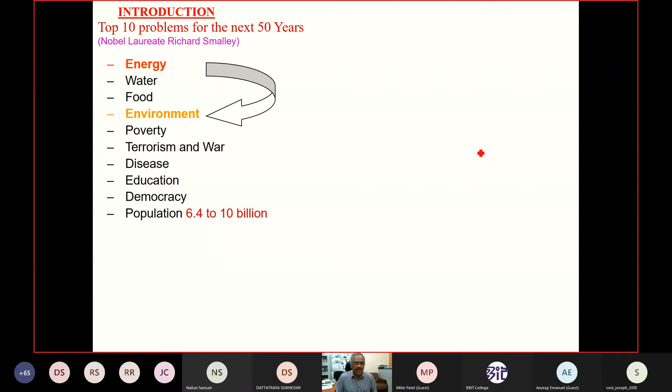If you look at the present scenario, we are facing several problems, and if you list out the top 10 problems for the next 50 years or 5 decades: energy, water, food, environment, poverty, terrorism and war, diseases, education, democracy and population. But energy cannot be addressed in isolation. Energy will always be tied with the environment because any energy consumption will have an impact on the environment. So energy and environment go together, and the top three problems—food, water, and clean energy—are very important.

Apart from that, energy consumption can solve most of these problems, and the world's energy consumption is rapidly increasing, exponentially increasing. Mainly, predominantly, this is a fossil fuel based energy scenario, so therefore the environment will have a severe impact.

The standard of living of any country depends on energy consumption. So energy consumption is very important, and one aspect is what you mentioned as buried energy - that means the energy which is mainly for space heating and other applications. But now I'll mainly focus on renewable energy, mainly solar energy, and how we can use it for heat, mainly space heating and cooling applications, which we'll discuss as part of this course.

Before that, we should know what this energy is, how it is coming, and what the major issues with these energy sources are. Energy sources can be broadly classified into two categories. One is celestial or income energy. This celestial or income energy is reaching the Earth's surface from outer space. That's why it's called income energy, or which is coming from outer space.

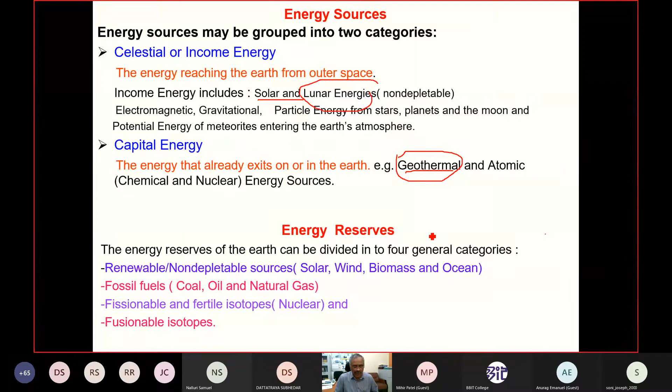If you look at these sources, they are transformed into reserves, and energy reserves of the earth can be divided into four categories. One is renewable or non-depletable sources, which includes solar, wind, biomass and ocean. Then fossil fuels - coal, oil, natural gas - and nuclear. The nuclear can be any form, like fusion or fission.

As I mentioned, the present energy scenario is fossil fuel driven, so there's an adverse effect on the environment also. The technological challenges mainly for greenhouse gas concentration in the atmosphere mean no single policy can address this problem - there are different regions, resources, markets, preferences, scale-up requirements, technology timings, and infrastructure.

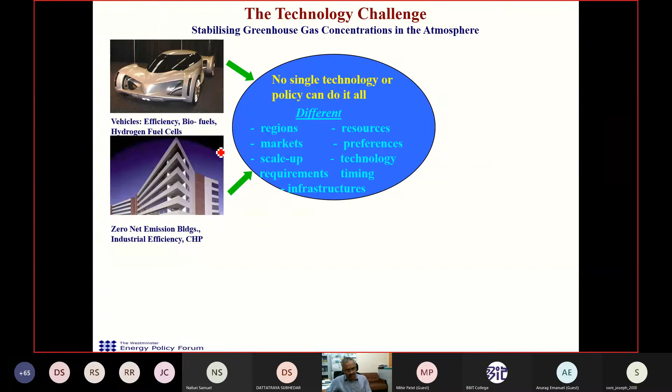If you look at that, there are various technological and other aspects. Those include energy efficiency in vehicles, biofuels, hydrogen fuel cells, and so on. Then buildings - net zero emission buildings - industrial efficiency, combined heat and power, nuclear power generation, carbon sequestration, and advanced power grids, and biofuel, solar power, renewable energy in various forms.

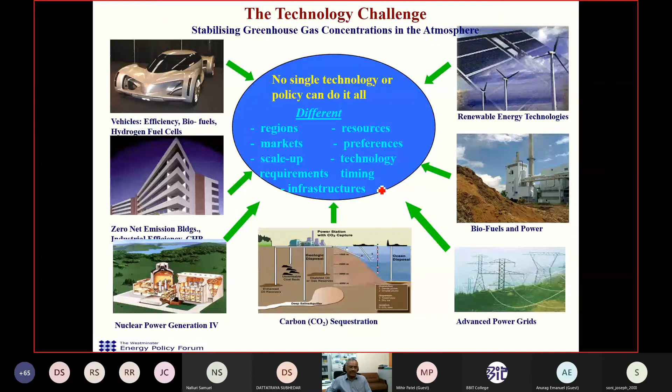So because it's not a single technology solution that can serve our purpose, it's important to have a comprehensive energy system analysis. This can bridge the gap between energy demand and supply. Not only that, environmental concerns will also be addressed through a comprehensive approach, so it's important to stabilize the greenhouse gases.

So therefore, it's important to utilize renewable energy for energy consumption.

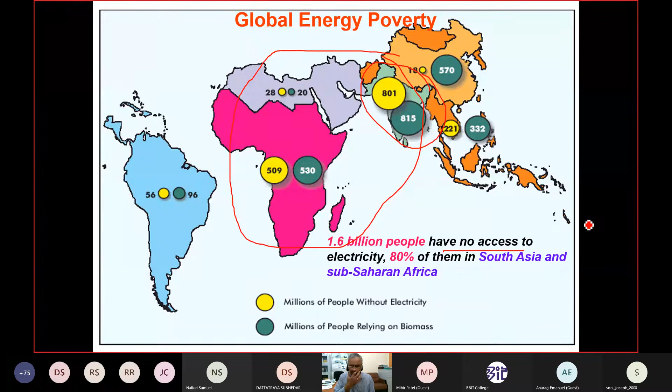So therefore, it's very important to come up with sustainable energy. Energy sustainability is very important.

As far as India is concerned, we import all forms of energy sources like coal, oil, and gas. India is a large producer, the fourth largest producer of coal, but still we import coal because of its quality. Most Indian coal thermal power plants import coal from Indonesia, Australia, and South Africa. Apart from coal, other important energy sources we import are oil, gas, and nuclear. So energy sustainability is important.

In fact, more than 75% of oil is imported. Once the oil is imported, it's primarily meant for mobility applications like transportation. So we feel that we need this transportation.

Look at the cars now - you name any car in the world, they are available in India. If you look 20-25 years back, there were hardly one or two car companies. Now there are many car companies, and most of these cars are based on non-indigenous, foreign technologies, and we are consuming foreign fuel and polluting the Indian environment.

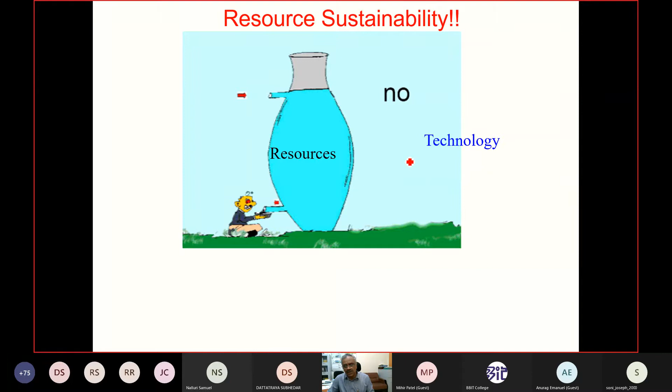If you have the technology, we can keep resources for future generations while taking our own share through this technology. These technologies, as far as energy is concerned, mean renewable energy technology - this is only symbolic, but what I mean is sustainability is important. Energy sustainability is important, because future generations need to remember there is only one Earth.

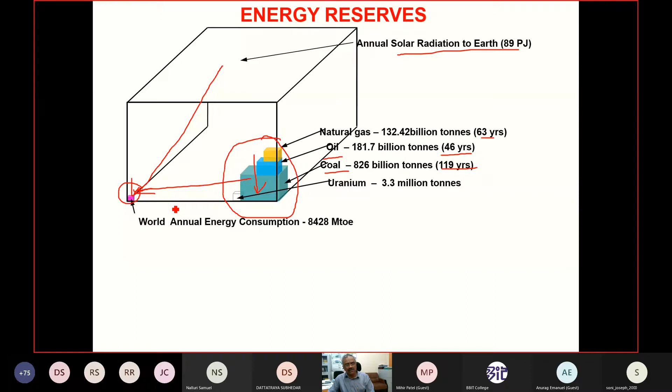But in contrast to this, there is unlimited annual solar radiation available, which can feed the demand indefinitely. If you look at statistics on energy stocks, we have abundant coal, a large amount, but it's poor quality coal. Oil is very limited, gas is very limited, and nuclear to a certain extent. So the oil and gas we may not see after a couple of decades.

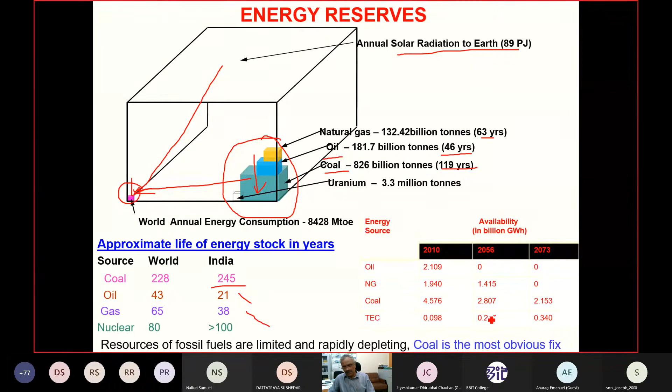Therefore, it's very important to come up with clean technologies. The most important clean technology approach is renewable energy technologies, primarily solar energy. All other renewables like wind, biomass, and other forms of renewables are manifestations of solar energy.

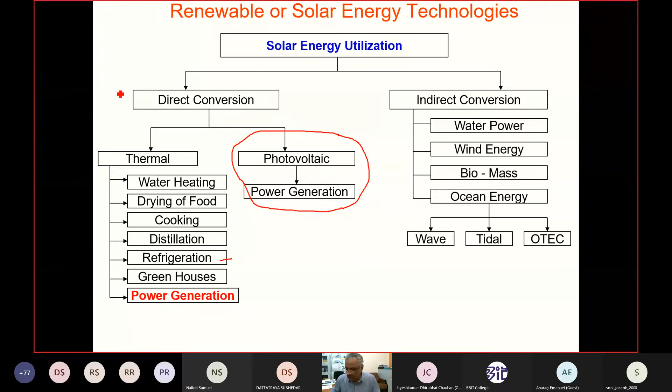So there are several technologies. Mainly, I am going to discuss some of the indigenous technologies, more used for sustainable development, and how the energy can be used for building sectors also, because the focus is on the building sector.

So concentrating solar power is producing high temperature heat, and mainly electricity is produced by burning fossil fuels. Coal is burnt and supplied to the heat engine. But if we replace this coal by sun's energy to produce electricity, then it's called a renewable system.

Since we need high temperature, we need to concentrate the solar energy, so it's called concentrating solar power. There are several technologies available to convert solar energy into high temperature heat: parabolic trough, parabolic dish, linear Fresnel reflector, power towers, and so on.

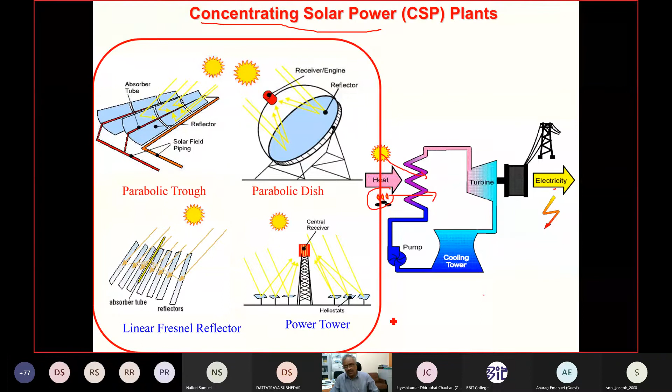Based on temperature, they can be classified into CSP technology for medium temperature and high temperature. Medium temperature is between 100 to 400, whereas anything higher than 400 is referred to as high temperature. These technologies exist for both medium and high temperature, and are essentially concentrating solar power technologies. In the medium temperature category, you have linear Fresnel reflector and parabolic trough collectors, while the other side is central receiver and parabolic dish.

So we are working mainly at IIT Madras on indigenous technology development, on solar energy activities, mainly concentrating solar power, solar thermal technologies, mainly design of solar thermal concentrators and receivers. Apart from that, concentrating photovoltaics, mainly integration and optimization of high performance solar concentrating photovoltaic systems meant for cogeneration and trigeneration aspects.

Solar energy storage and desalination are also important. The design of a transparent insulation material based solar integrated collector storage is one area where energy efficiency is taken into account. Apart from that, solar desalination materials for solar energy conversion and characterization of solar energy materials.

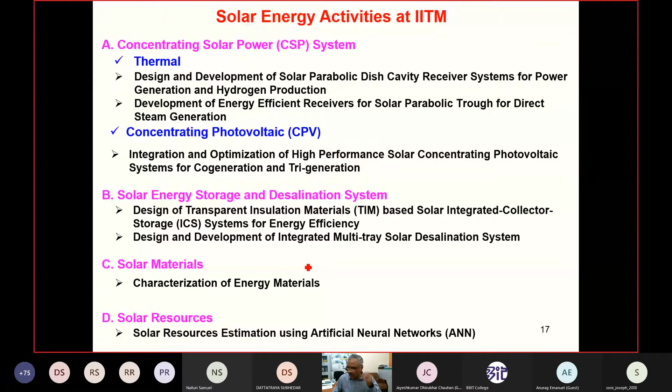Resource estimation is about finding out the energy available at a given location, mainly to come up with new systems at new locations, so it's important to know the solar resources. This can be either measured or estimated. If measured, we need instrumentation, which is very expensive, so we go for estimation. Estimation requires tools, and artificial neural networks is one of the important tools for estimating solar radiation.

Another application is desalination. Water is everywhere, but we need potable water, and that conversion requires energy. Solar energy conversion becomes an attractive option here, whether it's brackish water or sea water. Especially along the entire Indian coast, solar energy can be used to produce pure water.

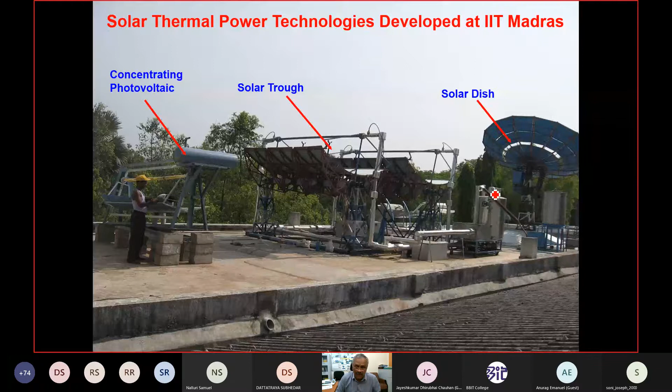Our approach is a 4D approach: design, development, demonstration, and deployment, mainly for concentrating solar energy. It is developed to the demonstration scale, so it can be taken directly to the field. We have some industrial associates who have already taken some of this technology to the field.

This is one such concentrator, made of mirrors. Radiation from the sun comes here and gets reflected. This is a collection receiver which collects the reflected radiation, and subsequently it is transferred to the working fluid and taken back. This requires two-axis tracking.

Development of cavity receivers for such high temperature and high pressure applications is very important. We have done substantial work on solar receivers, mainly for process heat and power generation applications.

This is a dish that rotates on two axes, with respect to both elevation and azimuth, and we can circulate fluid through it. This is a typical photograph of that setup, and the receiver plays a major role here, mainly for solar thermal conversion. Otherwise, there would be plenty of heat losses to the atmosphere.

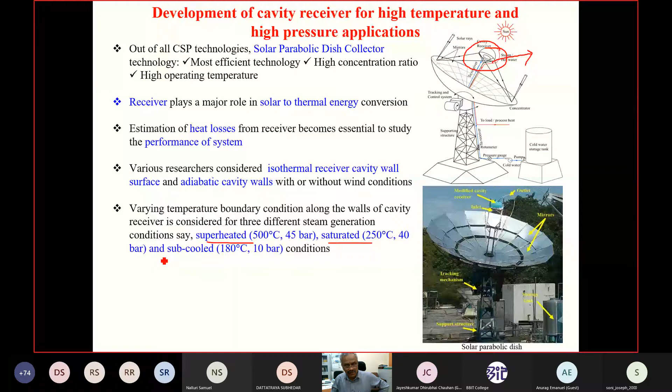So losses from the receiver are an essentially important consideration for performance when studying the system. Various considerations are taken into account, such as isothermal walls and adiabatic walls, and we study superheated, saturated, and subcooled conditions with respect to temperature and pressure. This has a wide range of applications: superheated steam can be used in power generation, saturated steam in food and textile industries, and subcooled systems in pulp industries and air conditioning applications.

As this program is on building energy, which can be used for space conditioning, similarly solar energy can also be used for space conditioning applications. Then we did a lot of numerical studies.

This mainly involves development of receivers and analyzing convection and radiation heat losses using computational methods, showing the distribution of temperatures and fluid flow. The fluid enters here, flows through, and comes back as high temperature heat.

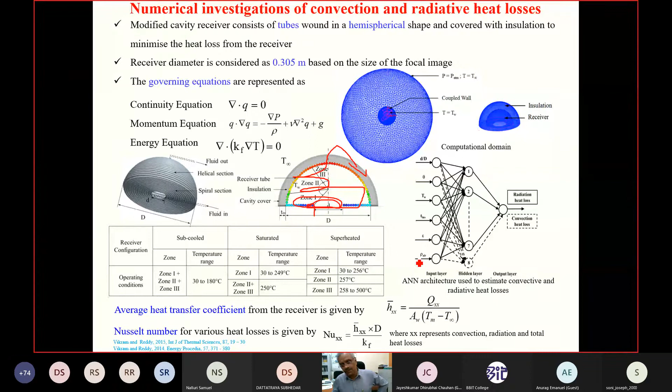We use neural networks to estimate the overall performance of these receivers based on the construction. Several receivers have been studied, mainly for optimizing based on heat transfer and overall performance and heat collection.

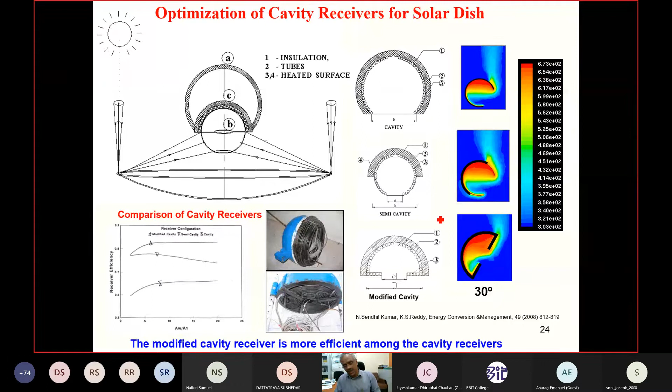There are essentially three receivers: cavity, semi-cavity and modified cavity receivers that have been tested. The modified cavity receiver has to be tracked continuously from morning to evening, so the heat losses differ from morning to noon, and it's important during tracking to estimate the heat losses.

It is designed from the accurate sharp dish to the fuzzy focal dish, and then it's a wide angle reflection. The receiver plays an important role, mainly in collection of solar energy, and it should convert maximum energy from solar energy with minimum losses.

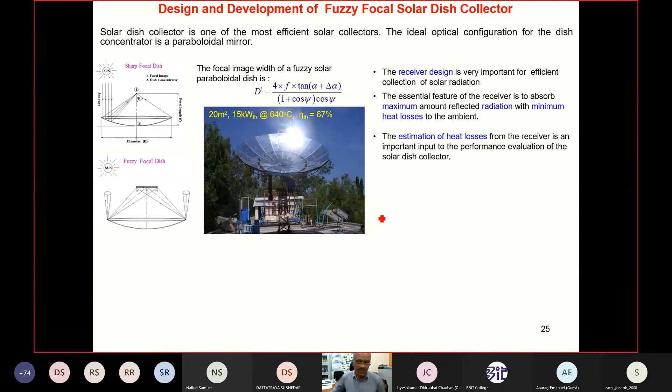So its geometry, orientation, temperature, and wind speed play an important role, and the modified cavity seems to be more efficient compared to the others. A detailed analysis has been carried out for heat losses and so on.

So the average, these are mainly non-dimensional parameters, and we studied the different heat losses in different orientations, because the heat loss to the environment will have different configurations - it dynamically changes depending on the location of the receiver.

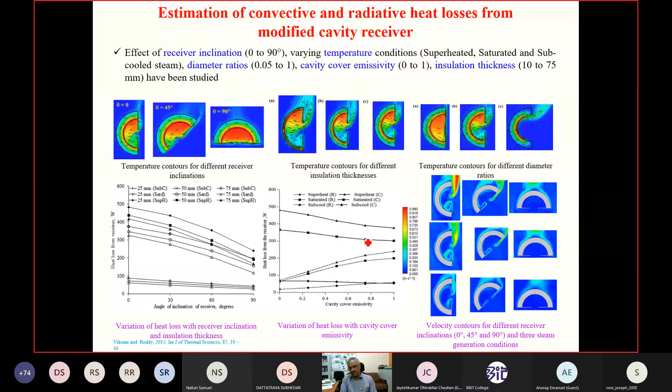It has been estimated and found that wherever higher losses are involved, they can be avoided by appropriate designs and so on.

It can be placed in a large scale field. We are now planning to use this dish collector system mainly for space conditioning, geothermal, in the Ladakh and Leh region. Recently we got a project to produce heat, so that heat can be used for space, like building space conditioning, and can also be used for cooking applications and for a food dryer.

In the Ladakh region, apricots are common, so drying of fruits is also very important. Solar energy produced by this type of dish collector can be used for these applications: cooking, drying, and space conditioning.

I'm not going into the details of the mathematics, because for one system, we cannot go for an infinite size - it is finite. But if you want to go for a large scale power plant, it needs to be connected as an array, connected in the field.

When you have a field, there are several dishes surrounding a given dish, and when the sun moves from east to west, it gets covered and no energy comes through. So it's important to have appropriate spacing between them.

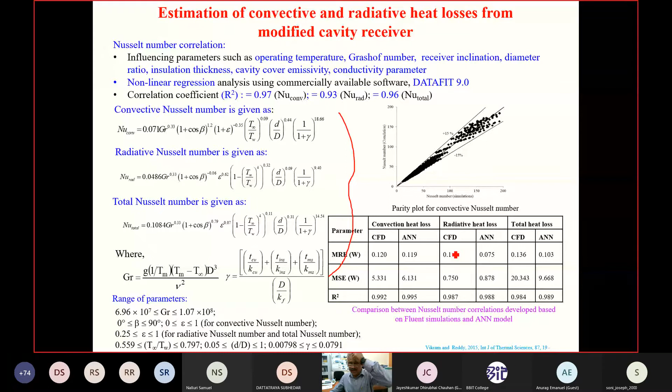So we have to find out the estimation of these losses from the modified cavity by different methods. Mainly natural convection and forced convection play a major role, and we need to find out how this depends on temperature, compared with ANN, artificial neural networks.

There are several losses involved here - head-on losses, side-on losses - and these losses need to be predicted by estimations, and we have to see how they vary from time to time, from 0 degrees to 90 degrees and so on.

Forced convection heat transfer is sometimes predominant, mainly under saturated and superheated conditions. So it's important to study explicitly how the behavior is.

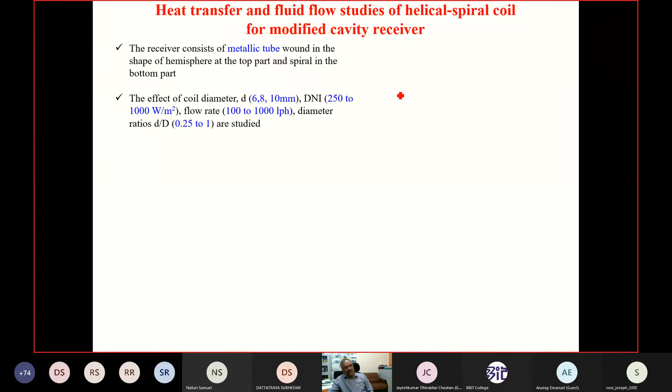The receiver is very important because it is the heart of the system. The receiver should collect maximum energy with minimum losses. There are metallic tube collectors, receivers, of different sizes of concentrators, and we need to determine the length of the receiver required, and so on.

A typical concentrator looks like this, with a monotube boiler concept, and we can look closely at how the gridding and grid generation is done here.

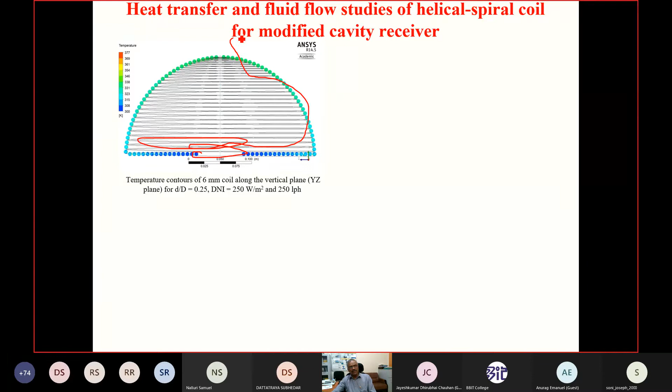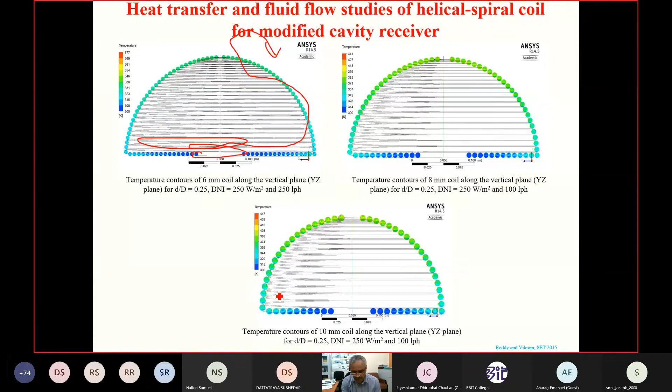So the heat transfer through helicals, it goes here, as I mentioned, and then comes out from here. So heat transfer studies are very important with respect to flow conditions, and these are 3 different conditions where low temperature hot water is circulated in the boiler, producing saturated or superheated steam.

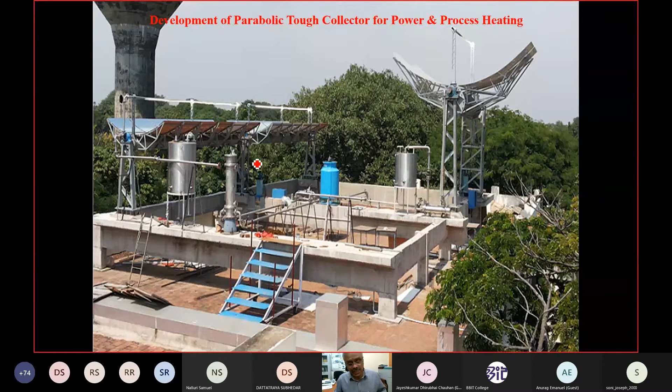This is a very important thing. We can go for process heat and power generation applications at large scale. This is installed in our lab at IIT Madras with a heat exchanger network, and here the receiver plays a major role.

It's an enclosed receiver - absorber coating, vacuum, and glass envelope, glass to metal seal, absorber stability all play a major role. It's an important component, so it needs to be developed indigenously and used for local conditions, because these have their own issues like absorber coatings, vacuum, glass envelope, glass to metal seal, and absorber stability - several aspects need to be studied.

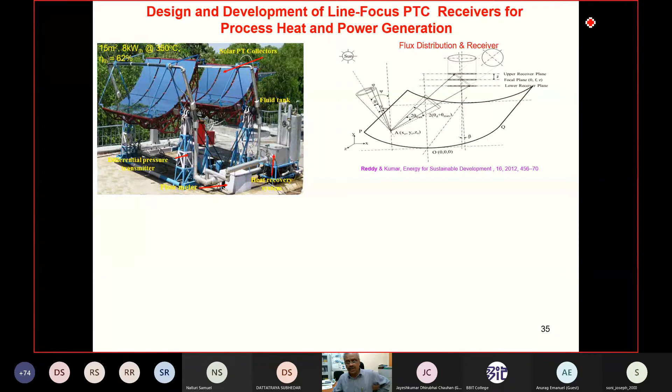We can use this for process heat applications, one of which is space conditioning, and also power generation. We do detailed optical analysis of how the ray moves from sun to target, and that needs to be tracked to find out the flux distribution in the receiver.

So there are various technologies. Some of my students worked on this to produce an effective heat transfer mechanism in the receiver, and a porous receiver configuration was proposed. We optimized and came up with an optimal configuration for this receiver system.

This receiver will be positioned here in this case, and the performance seems to be better for both water and thermic fluids, but it needs to be studied thoroughly.

Another configuration is the linear Fresnel reflector, where there are flat mirrors and solar radiation coming from the sky reflects onto the receiver. There are several such mirrors placed on the other side as well. Here it comes and then reflects here like this.

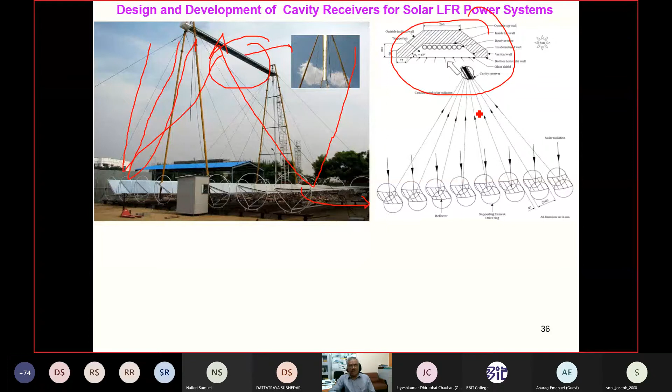This is called a linear Fresnel reflector. If this place looks like this, the bright sun focuses onto the receiver through different mirrors placed here, and they all focus onto the receiver. Design of this receiver plays an important role from a thermodynamic analysis point of view, and from an optical performance point of view.

We've come up with an optical configuration under different conditions depending on heat losses and so on, and installed this in a school where these panels are tracked accordingly - this panel is tracked from morning to evening.

The rays coming here are reflected the same way. There are two units, and this is energy storage - more of a buried energy system with a phase change, where hot energy is stored. This is essentially the design and development of a storage-integrated LFR system with 50 kilowatt thermal capacity.

It operates at higher temperatures and pressures, about 350 to 400 degrees Celsius. This is installed at the Pathashala campus close to Chennai, Kanchipuram, and it produces heat, air conditioning, water, and supports cooking.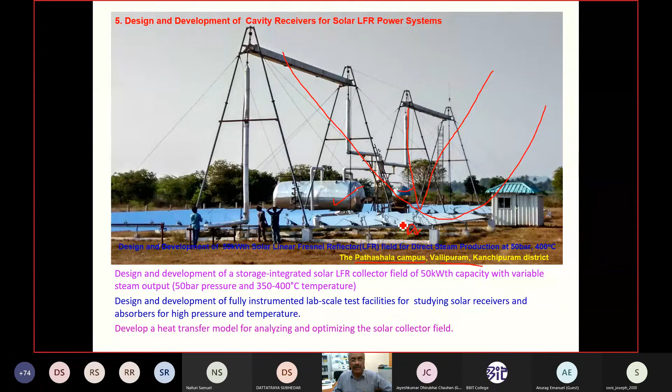All this is part of a power generation system, and it's working. We've analyzed the flux distribution, how the ray is reflected here - you can see it focusing here.

We need to look at how the configuration should be - water should circulate through this, and the radiation which comes here gets reflected onto the receiver. Similarly here, it's a similar configuration - if you look schematically, this represents like this.

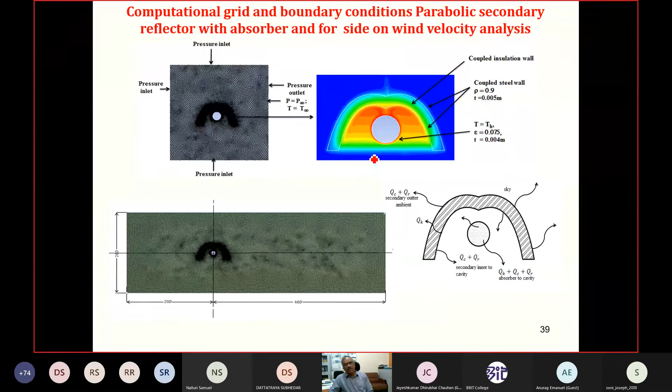For this too, the receiver needs to be analyzed to achieve high performance and higher yield. One of my students has done thermodynamic and heat transfer analysis, coming up with an optimal receiver configuration. It's important to see how the receiver distribution behaves, especially when wind also blows here, since this is an outdoor system.

It is subjected to high windy, gusty conditions, and dusty conditions, because especially in India, tough dust is accumulated. So dust plays a major role in overall performance. We have completely studied this with different wind conditions and different angles of attack and so on.

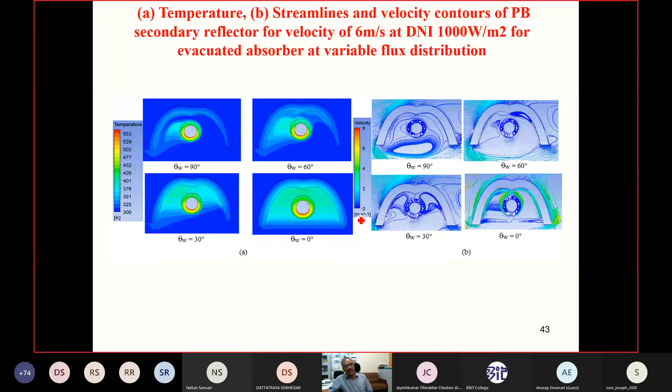Since solar thermal collectors require a concentrator, which may require a tracking system, we asked whether we can design such a system without tracking so that it will have less cost, and also cater to low temperature and medium temperature applications.

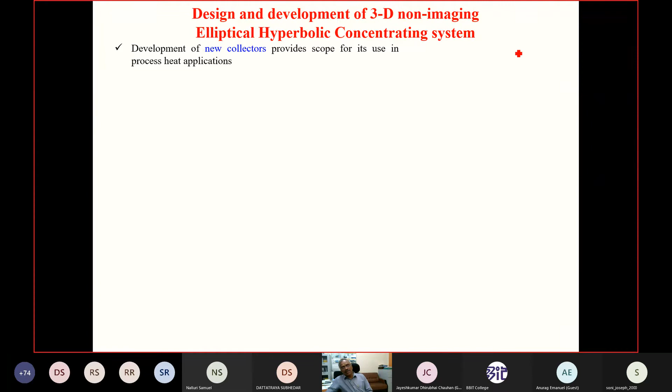So we developed the three-dimensional non-imaging elliptical hyperbolic concentrator. It looks like this: it's an elliptical aperture and hyperbolic in configuration. So this is the hyperbolic configuration, and this aperture is elliptical, and the rays go in here.

If you look at this, heat transfer studies are important here, and the design of this is very important. It looks like this: tubes are wound around this, and the inlet goes here, revolves, and comes back as an outlet. So it's a surface receiver. It absorbs energy, but careful design is required for this.

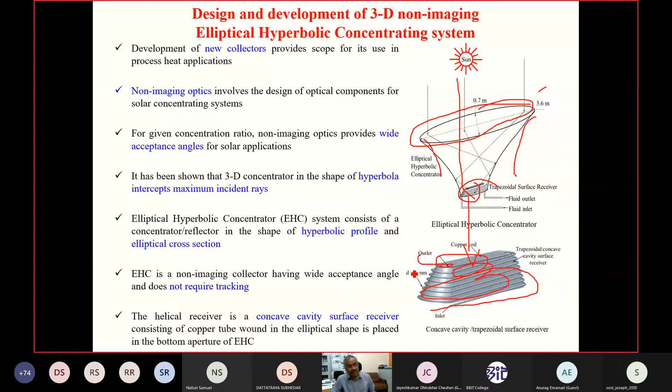The same design can be used for various sizes. This is a bigger size, and the radiation comes here and reflects onto this part. Depending upon the seasons and the conditions, we can find out how much energy is available.

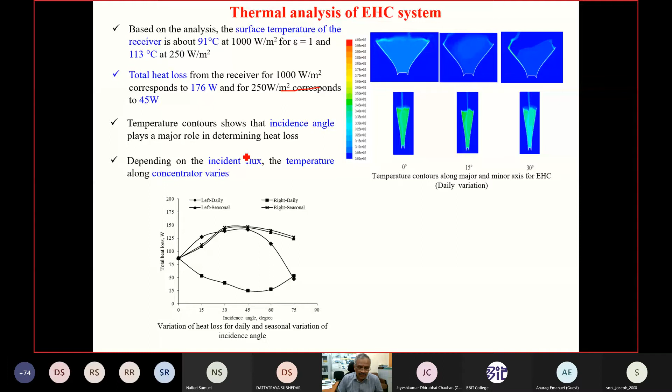This EHC analysis is substantial at various conditions, and its side view and front view need to be studied for heat losses, which are found to vary from 1000 watts per meter square under these conditions. The incident angle also plays a role in incident flux, temperature, and concentrator flux. Deeper studies have been carried out at IIT Madras with respect to two different incidence angles.

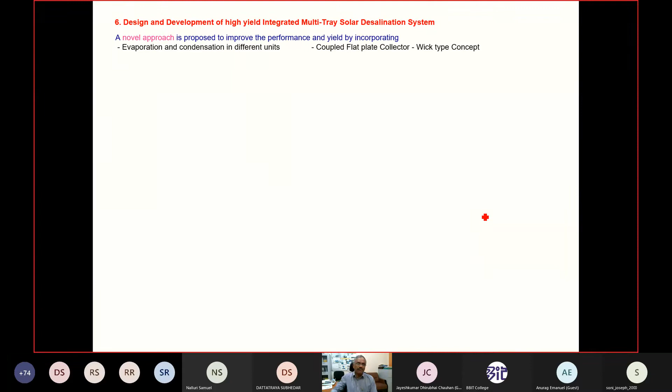Apart from that, desalination is another important aspect, converting brackish water into potable water, or seawater - especially in Chennai we see seawater - converting it into potable water. Where water scarcity exists, we developed a multi-tray solar desalination system. It's a novel approach in which the latent heat can also be used.

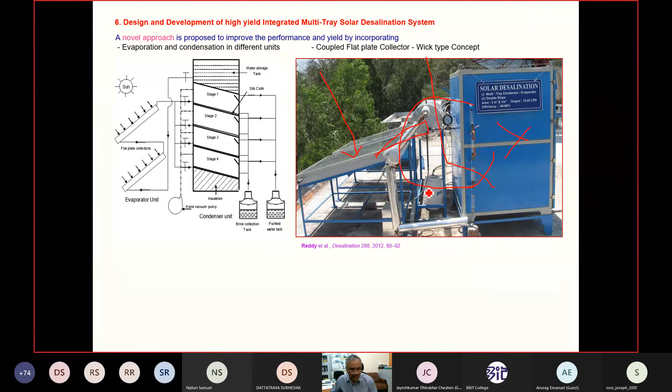It has been studied for different stages and different water conditions - brackish water, brine, fresh water, and saline water - and it was found to give satisfactory results, which can be used for commercial applications also.

Some of our technologies have been commercialized, as I indicated earlier, since indigenous technology development plays a role in giving end-to-end solutions.

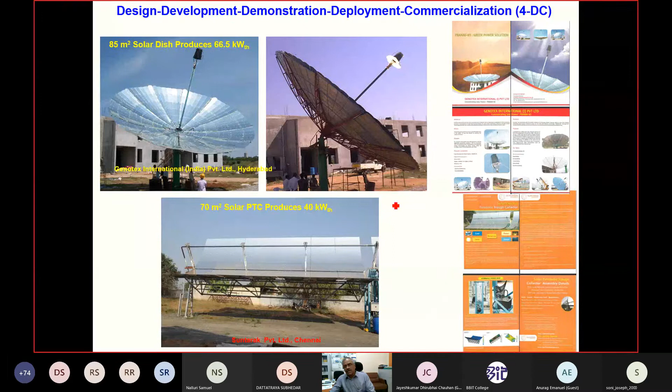These are some systems which have been given to industries. They have installed them at their locations, and these are brochures they are supplying commercially also. This is a system installed in Coimbatore, with one of our industrial associates.

This is also a linear Fresnel reflector. You can see there are two rows, and they can be tracked continuously to get this. So radiation coming from the sun should reflect onto this.

The fluid is circulated; it comes from the bottom, from the tank, goes like this and then comes back like this, and you can see here high temperature, high pressure steam. If you look at this, you can see the same view, how steam is coming out with very great force.

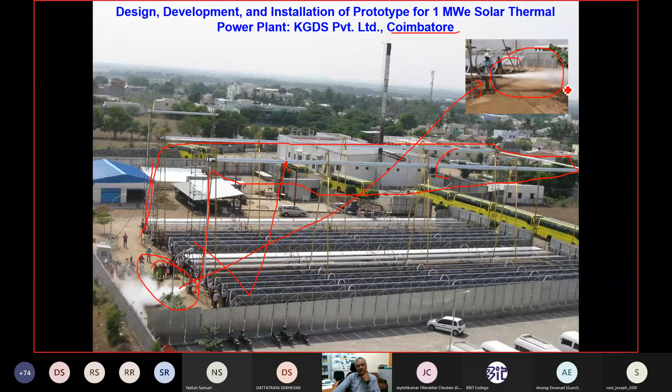Another technology in development for sustainable development is the design of solar energy driven textile effluent treatment. Mainly in Tamil Nadu, the Tirupur region is a textile hub where textile industries are getting closed because of stringent environmental norms. So it's better to come up with a solar technology for effluent treatment or reject treatment from textile industry.

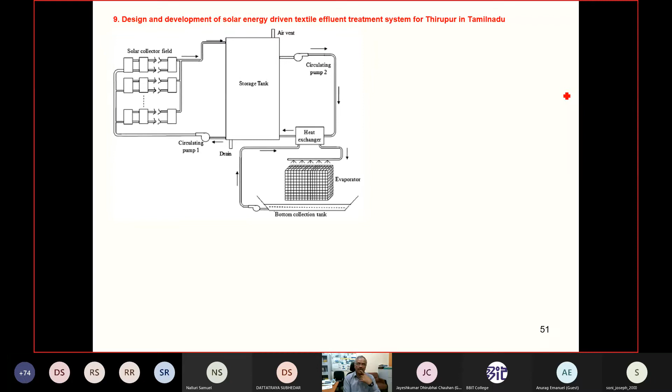We have come up with a configuration which we tested here for this textile industry. This is installed in Tirupur region in Tamil Nadu, and this is at our lab. We have tested here, and it's given a solution. The solution was given to the textile industry, and some of them have implemented it.

Another important technology here: zero discharge is important because under Swachh Bharat, cleanliness and toilets are an important thing. So we developed a solar powered zero discharge toilet. Zero discharge means both solid and liquid, and it is installed in one of our students' hostels, Krishna Hostel, for performance study.

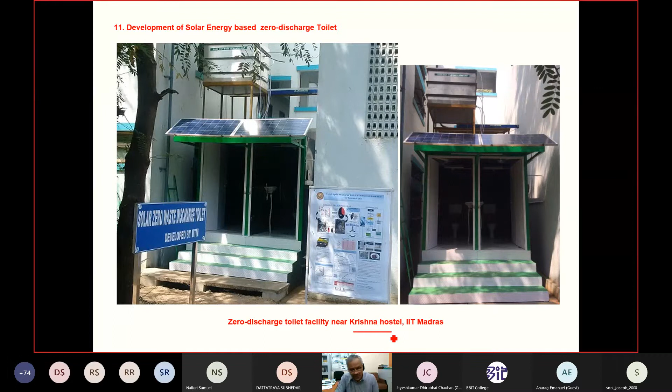And of course later we have commercialized this toilet. It doesn't give any liquid or solid discharge, and liquid is recycled, with some of the water reused, whereas solid is converted into fertilizer. And another important thing is mobility.

Solar energy based mobility is very important because nowadays we are talking about electric vehicles and so on. But if it is powered with solar energy, it becomes a cleaner fuel for automobiles. So an IRES, meaning integrated renewable energy system, in mobility has been implemented by us, using different configurations and components.

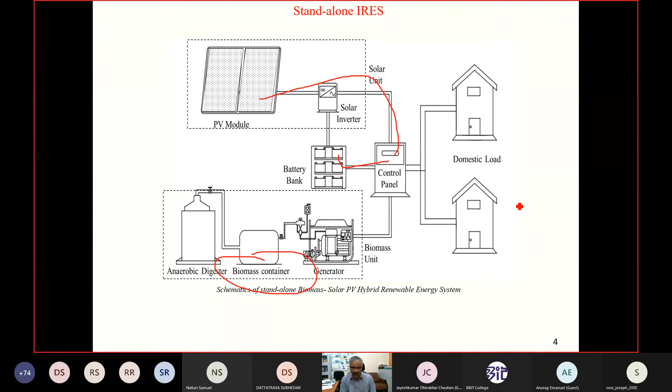This is a mobility system, but we also have an integrated renewable energy system with a battery, integrated with other types of renewable energy like biogas here, used for producing electricity through an engine. But parallelly solar comes here, and then it gives feedback and supplies electricity. We have implemented this type of system at Vishwabharati University, that is Shantiniketan in West Bengal.

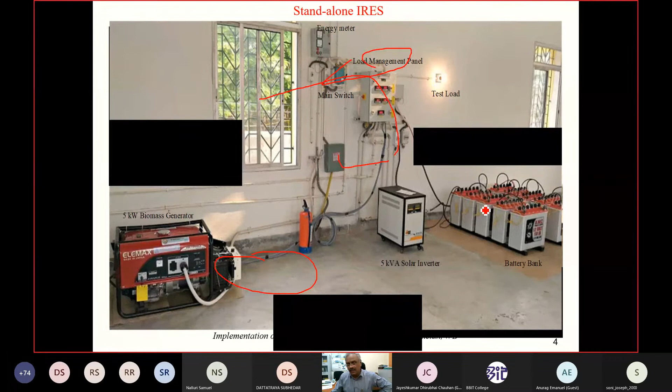Here you can see this is a standalone system. The biomass is integrated with solar panels on the top, and inside there is a generator which converts biogas into electricity and gives it to the control system, which then stores it in the battery, and vice versa. It can take power back from the battery for the load, depending upon the configuration.

Before that we tested at IIT Madras using these panels, with gas conversion into electricity using this generator, so we can integrate the PV and biomass system. Here it is in our lab.

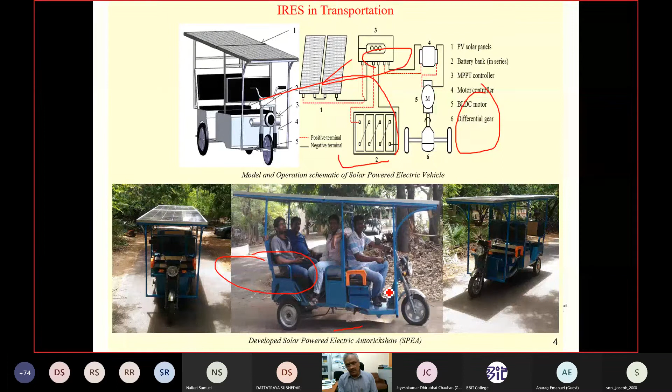I have already explained to you this mobility, how solar energy can be integrated into mobility. These are our students testing this vehicle under different dynamic load conditions, as well as dynamic road conditions, not only load but also road conditions.

We compared it with a commercial auto in terms of energy, emissions, and cost - how energy can be used and converted, and how, based on this, we can reduce emissions and so on. It seems to be good since it has a less payback period compared to this, and it can be adapted easily for mobility applications.

How energy management can be used for these systems, and what are the cost implications of this system here. Energy conservation is very important here. Energy efficiency is an important aspect here, because environmental pollution and climate change play a major role. So therefore, energy is important - because your course is on energy conservation.

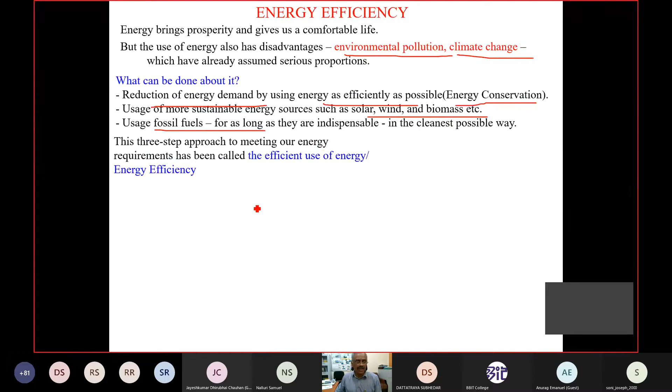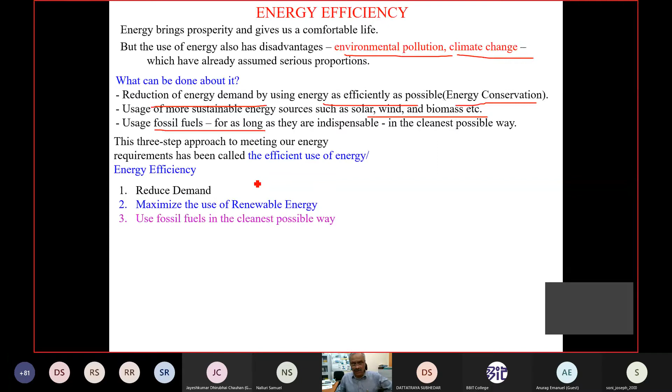Energy efficiency or energy conservation can be attained by reduction of energy demand, maximizing use of renewable energy sources, and use of fossil fuels in the cleanest possible way. This is a typical concept: reduce, reuse and recycle. Try to improve that.

Energy efficiency analysis is more important through energy management, and that energy management has to be most cost effective, energy efficient use of energy.

Energy efficiency is a very important concept for energy managers. The first law and second law of thermodynamics are used for evaluating the performance through coefficient of performance and so on, and first law, second law analysis can be implemented. First law of thermodynamics tells energy conversion from one form to the other, whereas the second law tells us the quality of energy conversion.

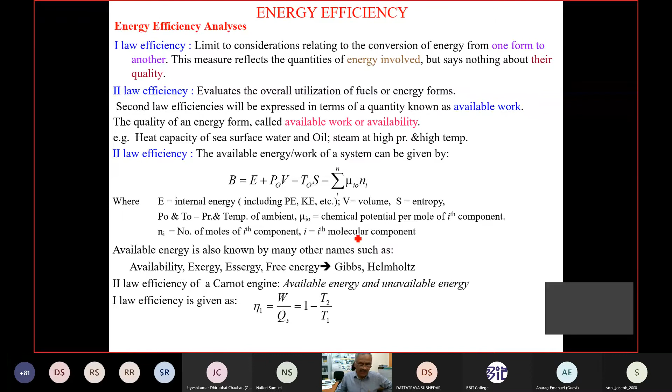There are several equations depending on the available energy. Available energy is known in many other forms like availability, exergy, essergy, Gibbs free energy, and so on. The performance can be given in terms of this, and second law efficiency is given based on the availability.

There are several performance parameters like effectiveness, which is mainly the theoretical maximum available work to accomplish the available work ratio. Major factors for inefficiency are mechanical and fluid friction, heat transfer, and electrical energy losses of availability. These are major causes for inefficiency.

Therefore we need to avoid these, and energy management is important. This energy management will result in energy efficiency in industries, but it can be even building sectors, commercial sectors also.

There are different phases of energy management. Energy management is defined as the art and science of optimizing energy, the optimum use of energy to maximize the profit, mainly reduce the cost, thereby improving economic competitiveness.

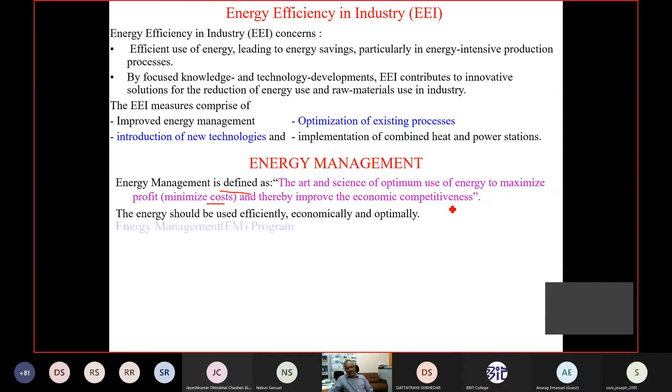The energy management program involves three phases: initiation phase, audit phase, and implementation phase. In the implementation phase, the goals are described, capital investment is required, and application of energy management is important.

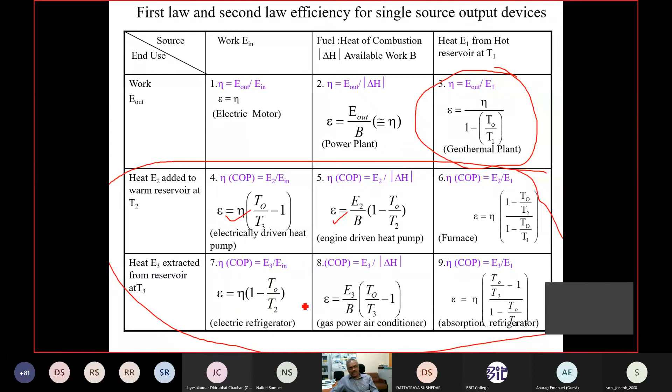There are several formulations; I am not going into details, but one of the important things is the geothermal plant, which is related to this course. Apart from that, heat pumps, both electrically driven, and air conditioners are important in case of space conditioning and absorption refrigeration. So these are very important in exploiting the buried energy with heat pumps and so on, refrigerators.

There are complex equations involved in mainly quantifying this energy, mainly from a quality point of view, which we call exergy, free energy, availability, and so on. So energy management will involve several aspects like initiation phase, audit and analysis phase, and implementation phase.

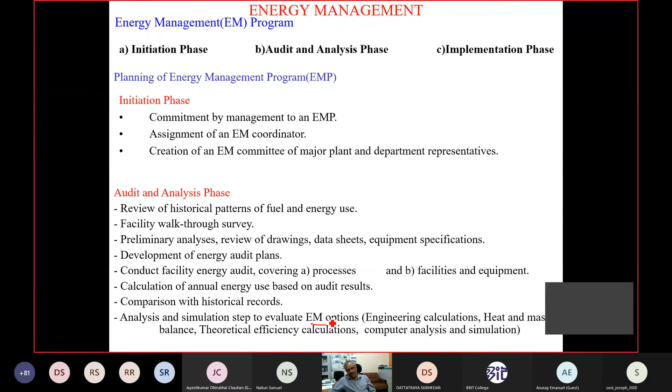Energy management will have a role in collecting the data, engineering calculations, heat and mass balance, theoretical energy efficiency calculations, and computer analysis and simulation. These are some of the aspects we need to see.

There are different phases. The energy management general principles consist of wide principles, almost 16 of them. It starts with a review leading to economic evaluation, involving several aspects such as substitution of materials, and then going for alternative energy sources and so on, each with their relative merits.

Overall, how much energy matters because the environment is important. Emissions in terms of carbon dioxide are very high, so how do we offset these? If you go for an automobile, you are producing CO2 and adding to your carbon footprint, whereas if you go for photovoltaics, it is negative, so therefore it is environmentally friendly.

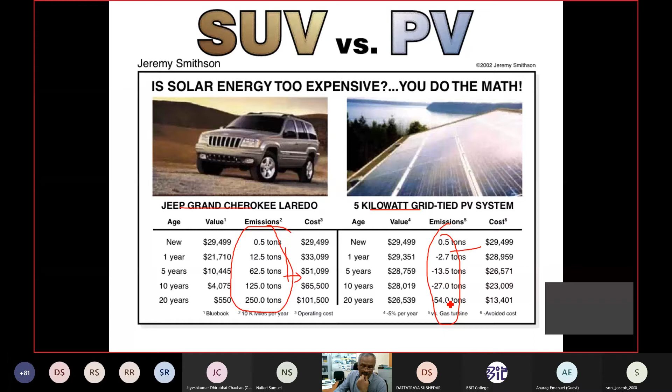Therefore cost analysis is very important in terms of payback period, and cash flows also play a major role here. The time value of money is important, and making decisions based on net present value, we need to arrive at this, and we can find out the payback period as one of the economic indicators.

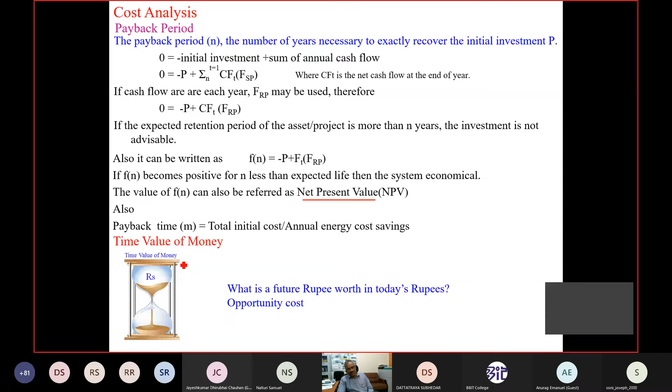To judge whether the project is viable or not, we consider its opportunity cost in terms of rupees today versus tomorrow. The plant cost today is not the same as after 10 years, so therefore their relative present value needs to be calculated when you go for energy management.

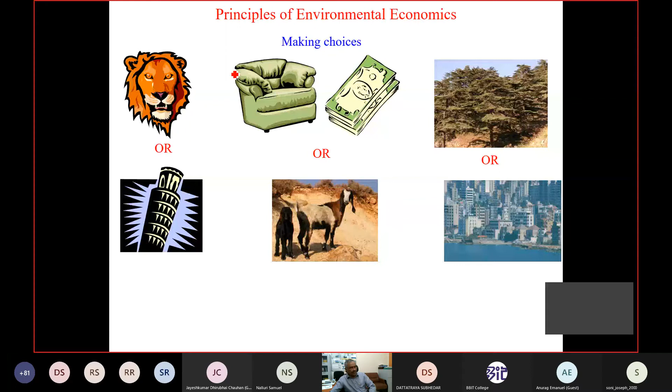There are several options whether you go for environmental economics or energy economics. So there should be a choice whether you go for development or take care of the environment, whether you want to burn the fuel or save the environment. That is an important thing.

One important aspect is buried energy, which is in the form of geothermal energy. Geothermal is heat that is in the earth, but we are talking about the earth which is still in molten state. The earth is in a molten state, which is magma and lava, but we are not going that deep.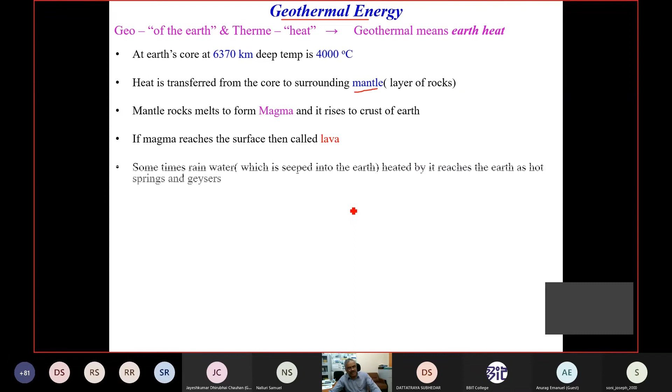There are several geothermal reservoirs, and they can be volcanoes, hot springs, and geysers. You must have seen geothermal energy in this format, like springs and so on. But what we can use this buried energy for is space conditioning, mainly geothermal energy at a low temperature scale, like hot springs and geysers for space conditioning and so on.

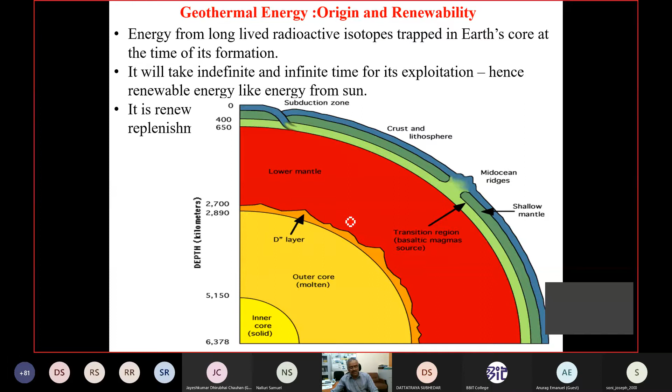It is like this. You can see the structure, but we are not worried much about this as far as this course is concerned. It has different layers, but any energy that is saved at the top layers is important, and that's what we are burying the energy into. It has different values.

So if you look at the earth structure, it will be like this. There are different geothermal reservoirs, and in India also we have some geothermal reservoirs which can be used for our applications, which includes Puga Valley of Ladakh and so on, and there are a lot of springs in the Himalaya here and there.

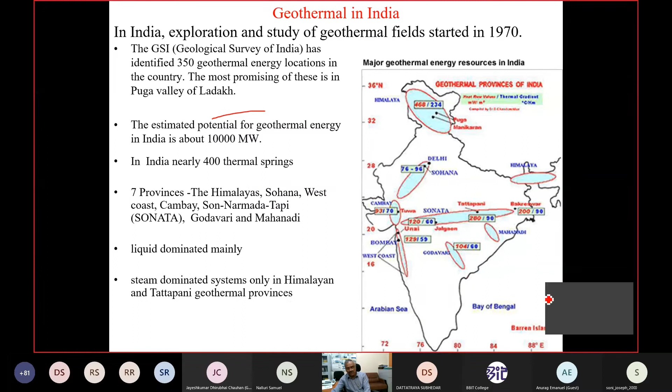How to use this energy? There are different types of geothermal regions like hyperthermal, semi-thermal, and normal, and natural hydrothermal circulations and hot springs, and rock dry fracturing are responsible for this.

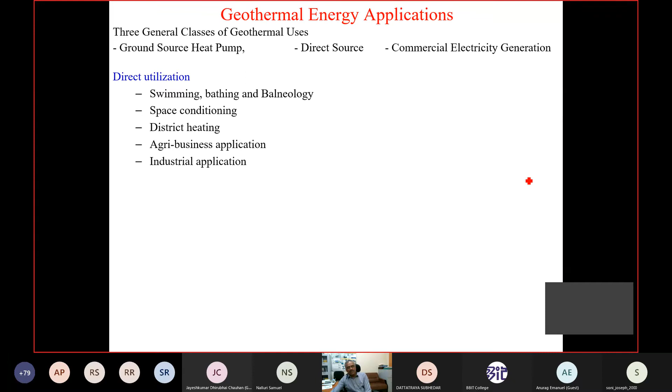There are different types of utilizations. You can use a ground source heat pump for the buried form, or direct source for commercial electricity generation, depending upon swimming pool, bath use. What are the applications of this buried energy? It can be swimming pool, bathing, space conditioning, district heating, agri-business applications, and so on.

Electricity can be generated with different technologies, and if the temperature is greater than 150 degrees, you have one technology, and if it is below 150, some other technology. There are different rates of performance of geothermal reservoirs depending on various parameters. They have listed 5 parameters here.

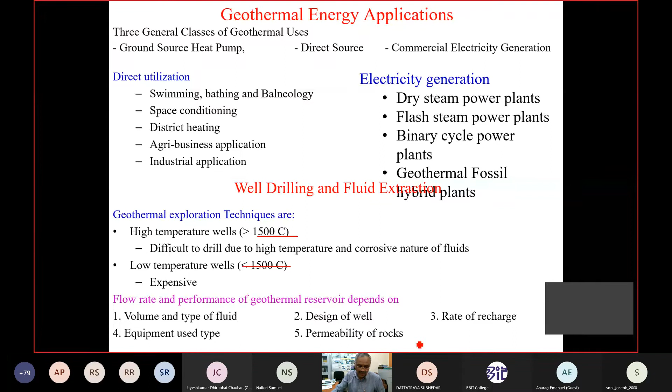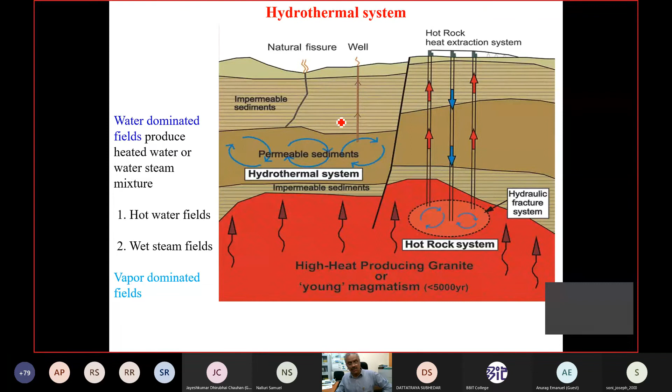Geothermal conversion is very important here, with hydrothermal and dry rock conditions. Water is pumped to the underground and brought back based on the locations, like these hot springs.

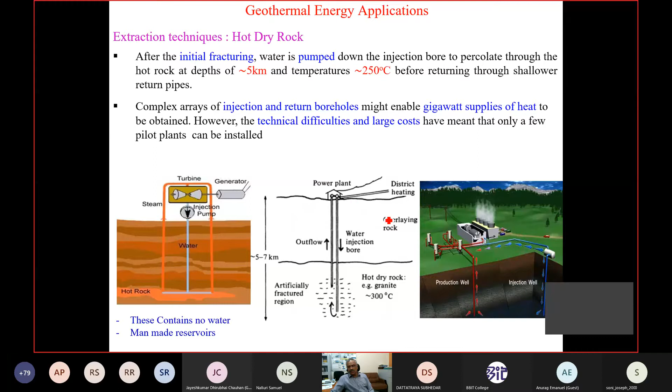There are a wide variety of applications. We can send water into the ground and recover it through geothermal means, used for power generation or space conditioning. We can do thermal analysis in geothermal, like how much energy is available, how we can save it into the underground and recover it. This complete analysis is there.

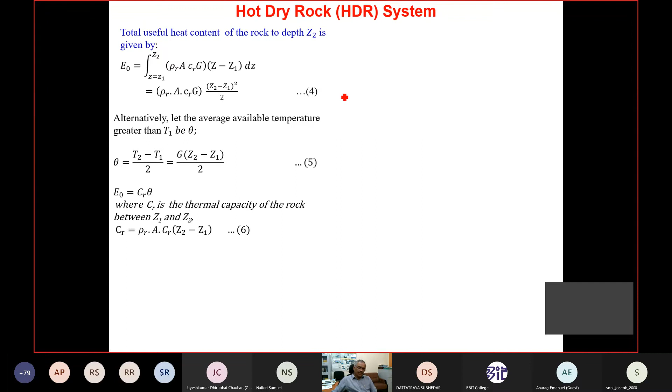Anyhow, it's beyond the scope of what I am giving you here. How to calculate the energy available underground can be done by these equations. There are different types of geological structure, and that is a hot dry rock system. Some equations are used, but this is beyond the scope of this course.

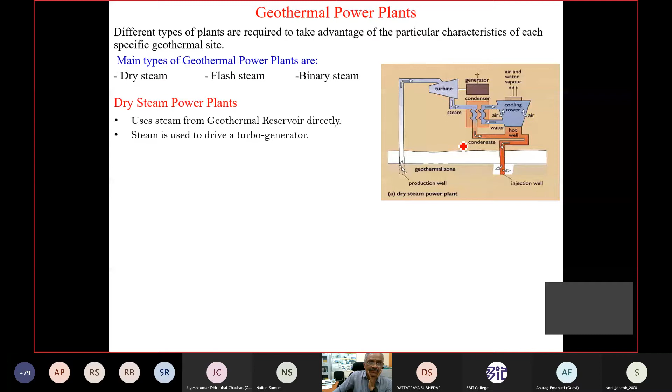There's also hot aquifer analysis, which we did assuming there is no interaction. So geothermal plants can take heat from geothermal energy and use it for power generation, for dry steam plants or flash steam geothermal plants. Mainly they are deeper, but you can use it for space conditioning at a higher level.

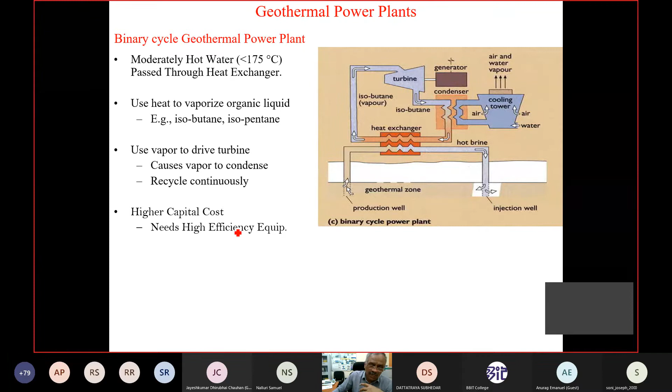This is another binary cycle based geothermal plant, which is used for getting the heat indirectly by using circulating geothermal fluid, because there's a contamination problem and environmental problem, so that can be avoided by this application.

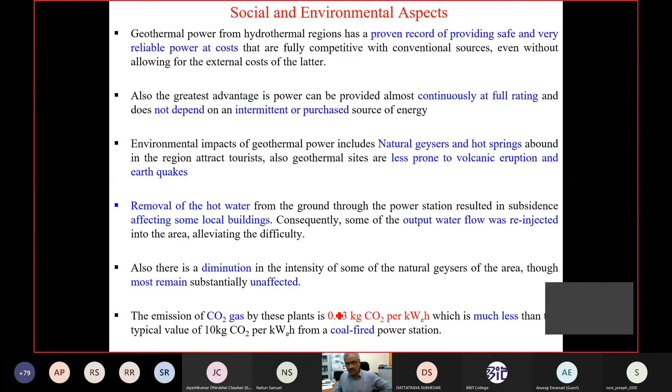Again, our approach is a 4D approach, which I have already explained. We worked on solar energy systems for process heat and power generation, and based on the 4D approach we developed models, prototypes, and so on. I've already explained this direct and indirect conversion, and this is another of those sources.